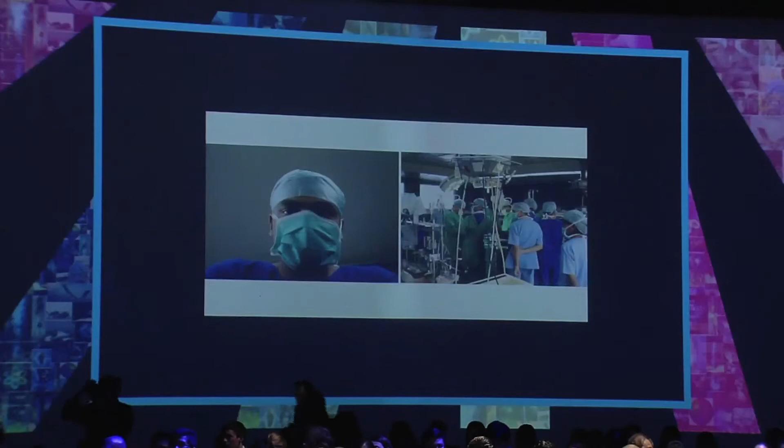By the time I was 20, we had what is now considered India's first state-of-the-art, internationally accredited hospital. And all future models of hospitals were then molded on this model.

This was a great learning experience working with doctors on my very first project, because doctors approach problems in a very simplistic manner. There's a famous saying called Occam's razor, which says the simplest solutions are most often the right solutions, and they use this to diagnose patients. When something is wrong, you don't immediately think cancer, you start with a common cold, and then you go from there. So we used those same design principles in our architecture firm going forward.

I'd like to take you through about 4 or 5 projects, starting from projects that are only $100 up to $100 million, and how we've applied those same principles to make sure that we provide a better quality of living for different economic societies. So these are a few more pictures of the hospital that was done back in 2005.

Fast forward to my master's program at Columbia University. TED Talks approached Columbia and gave us a design problem. They said, if you were to have a TED conference or a conference like this in the middle of nowhere for 250 people, how would you design the infrastructure to hold that kind of a conference? So me and 2 of my classmates, Nathan and Shay, we came up with what we call the Black Box Auditorium.

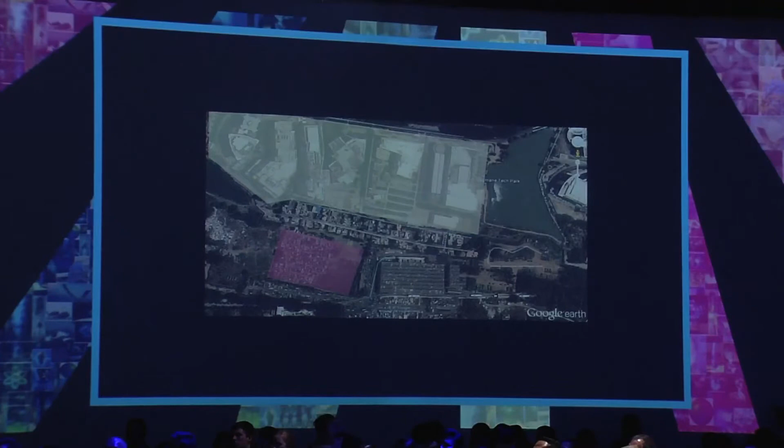I've highlighted in white the actual tech park, and behind it in pink is the slum families, all construction workers who helped build that. We realized that almost 95% of people who live in these slums are migrant construction workers. They move every 4 or 5 years from one place to the next in search of work, which is why they don't invest in homes — they know they have to move every 5 years.

So automatically, that set up the parameters for us to design: what if we design a house that you carry with you? Can it be done? Because if you can carry it with you and it's low cost, obviously they're going to invest in it. So we started, again, just like the black box, with a kit of parts.

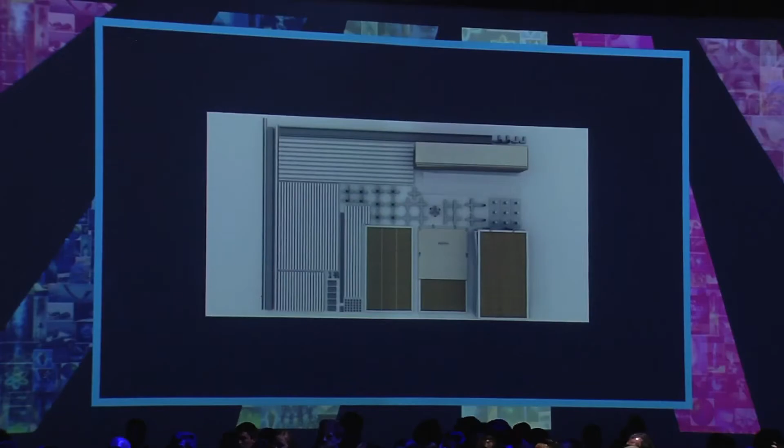We realized because they're construction workers, they're very familiar with construction materials. So we approached large construction companies and told them, at the end of every project, give us 5% of your scrap materials — your scaffolding, your plywood, your shuttering sheets used for concrete. And we designed a home for less than $300, which can be assembled, disassembled, is flood-proof, and is disaster-proof.

I'd like to take you through the first set of prototypes we did. How it works is you have a metal scaffolding base, which can be propped up on stilts, so it doesn't matter what the terrain is — if it's a slope, and if it rains, water goes right underneath it.

Then you start with the floor — we can have MS sheets, which is mild steel, again a scrap material. Then we set up the scaffolding, which is the framework, and then we do galvanized aluminum roof sheets.

And then we start bamboo panels. So we take bamboo, we strip it down, and we do weaved wall patterns so that you have a lot of light and ventilation through. And then you have polycarbonate sheets on the side, which allow a lot of light in. And then again, a bamboo with a sliding door in the front.

So this whole thing can be set up in less than 2 hours with just 2 people. And it costs less than $300, which is about what they make in a month. So if they were to save over about a year, without any government subsidy, they'll be able to afford this, which they can assemble and disassemble and carry with them.

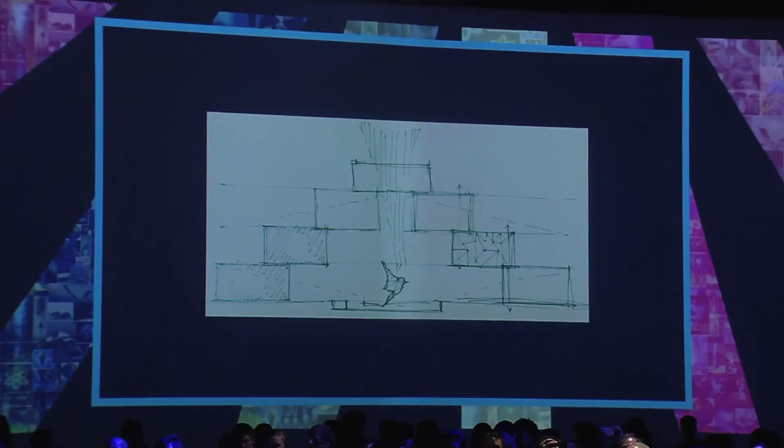I got a call after the Time article and all that. I got a call from a billionaire who I won't name, who said he's starting up a very huge prefabricated manufacturing facility just outside of Bangalore. And he said, I want a building, which is the R&D center, to be the crown jewel of it. You have an unlimited budget, do what you want, but the minute I look at the building, it should look like it's prefabricated. That is the only brief.

So we did a lot of program analysis and sketching, and then I presented this to him, and I said, what if I designed a building for you that looked like Lego blocks? Would you like that? And he started laughing. He's like, yeah, that's perfect. Let's do that. So we actually started working out the program.

So I'm going to take you through a series of diagrams over the next 3 or 4 projects with how we approach design so it's easily understandable. We start with your entries, then we define programs. So first you have the cafeteria, showrooms, community space, cores. So it keeps going.

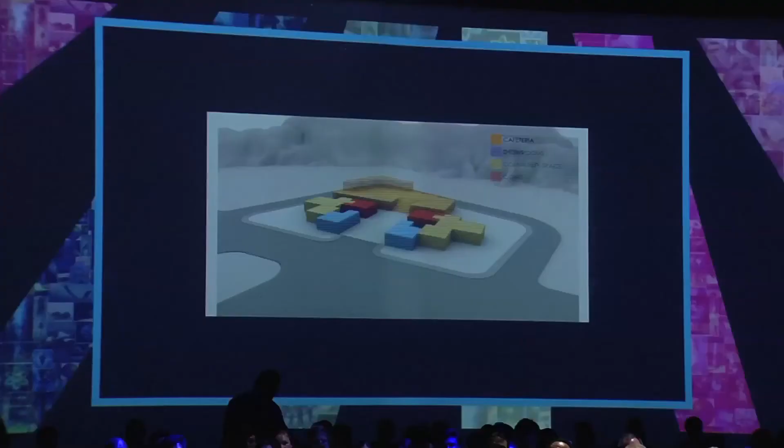And you can start seeing it take shape as a Lego building block. What we've done is we've designed it on a hierarchy, so the most public access is on the lower floors, and as you go higher, it gets better. And you have these terraced gardens around.

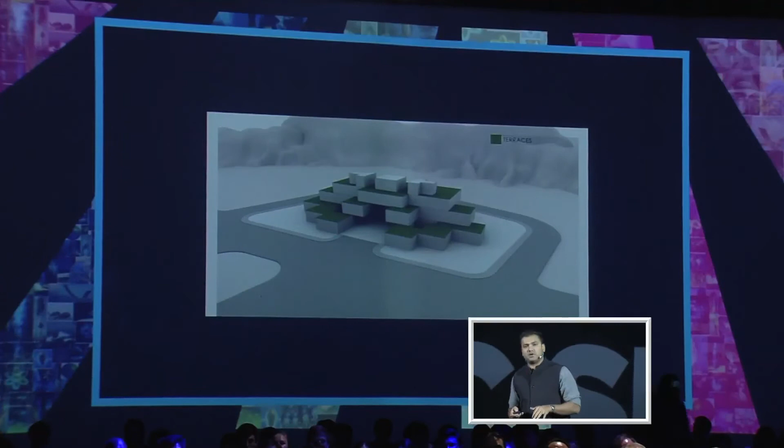So we actually went out and bought Legos, and we built the thing in Legos because we know that the compressive to tensile strength of Legos is the exact same as his prefabricated panels. So if we actually built it with Legos and it stood, there was a fairly good chance that it would stand in real life. So we worked backwards with the structural consultants, and we've just started the project.

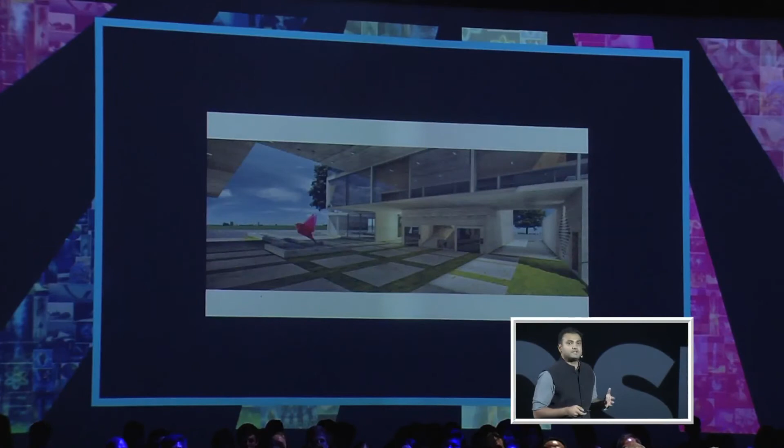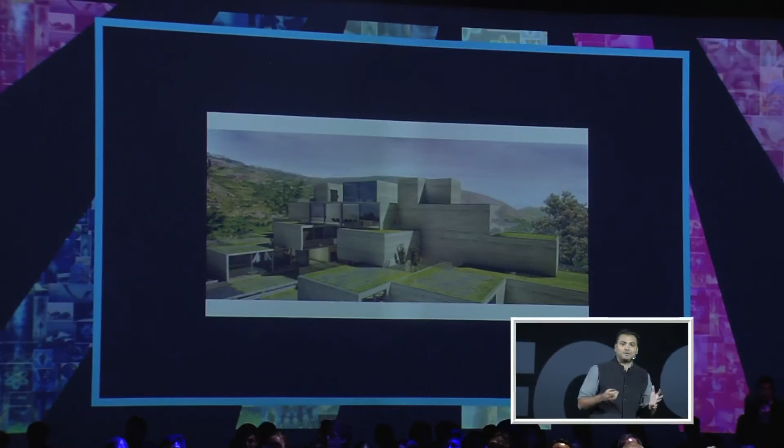Coming to another big project of ours. We started in earnest in 2011, and at that point it was just me and maybe 2 or 3 other people. And we got a call from another really big company, probably the world's 3rd largest steel manufacturer. They had just bought the Bangalore football franchise, and they wanted to build an incredible stadium.

And we had not even designed a football pitch, forget a stadium. And they said he watched one of my talks, and he was like, would you like to, there's absolutely no guarantee you're going to get the project, but would you like to pitch for this? So I said, sure, who else is in there? And they're like, it's an international competition, there are about 70 international firms taking part. I said, sure, why not? So I'd like to take you through our design, and hopefully you'll like it.

So it's a very tight site, about 9 acres. And they wanted to fit a 25,000-seat football stadium, a 250-room hotel, and mall and retail space, all in this one place.

So what we did first was a traffic analysis, because roads in India are very narrow, a lot of traffic, not unlike another city, which is your city. So we did a lot of traffic analysis, trying to understand which are the one-ways, the two-ways, and things like that. And then we did massing.

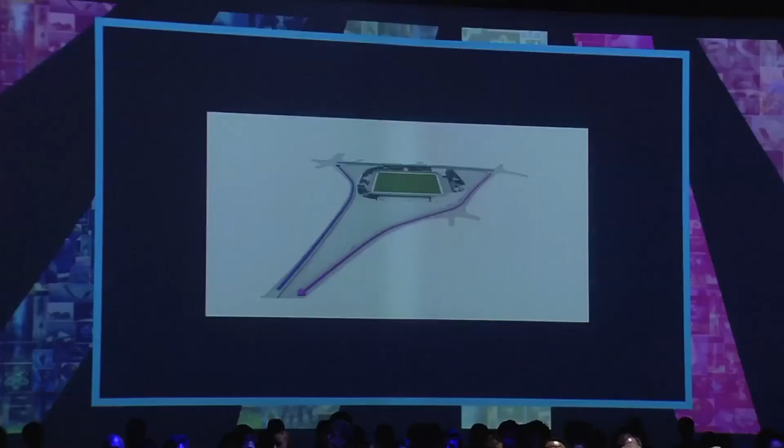And then we started designing how the entries were, how to go into the basements. We had various end users, so again we started to build it up. First the stadium, and then you had the mall and the retail space, and then you had the roof on top, and then you had the hotel tower.

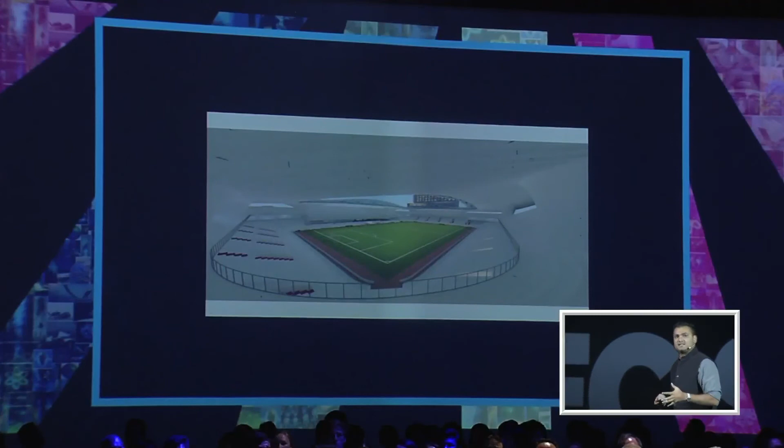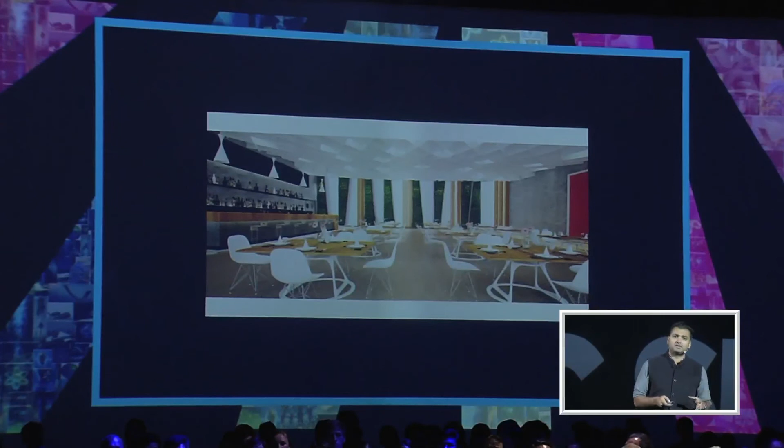So we started with the massing exercises, game day, and then you had LED lights built in so you can change the atmosphere, concerts, your concession stores, football locker rooms, VIP restaurants, the hotel, the VIP boxes. So that was the stadium.

So what happened with that project? We ended up winning the project.

Okay, I'm told I've got to wrap up in a minute, so I think I may have to jump through a few projects. This is another modular school project where they wanted to design in 2 stages, so I'm just going to quickly run through these. You get the gist of it.

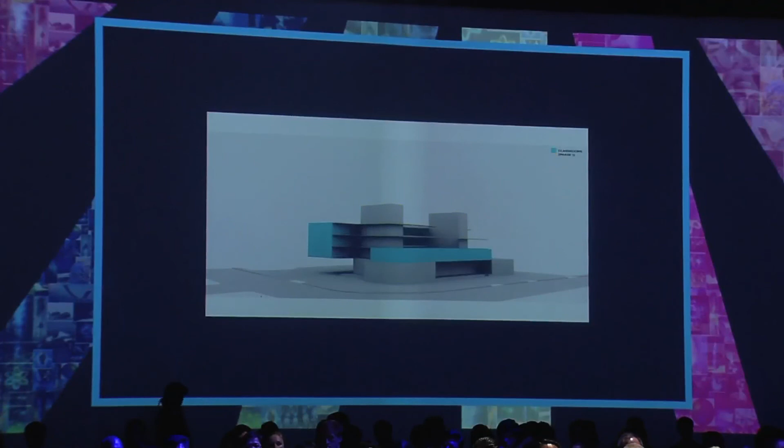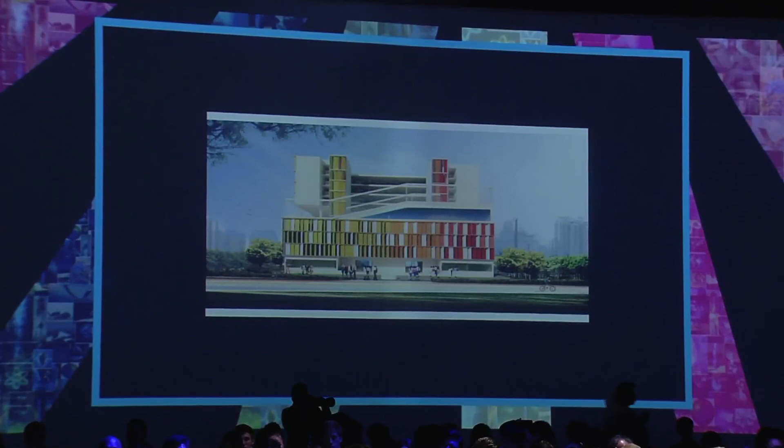What we do is we first understand the user base, the end user, and then we design phase-wise rather than focusing on what the building should actually look like. It's more important how it performs. The interesting thing about this project was we designed it with electroluminescent louvers, so during the time of the day when the sun moves, the louvers change color. So this is another really cool project.

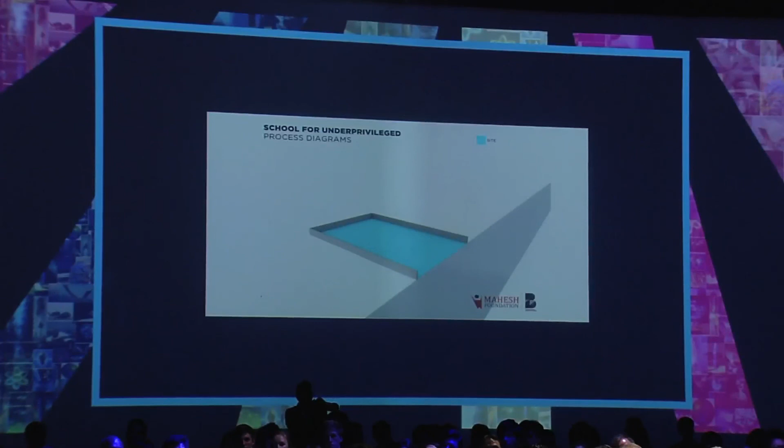And I think I'm going to wrap up. Our final project, I'm just going to run through this. We just finished, made out of bamboo. This is for the children that we started adopting - we're at 200 now with our partner organizations. So we've just started their first school project for them, built out of bamboo and laterite. So thank you, thanks, that's all my time.